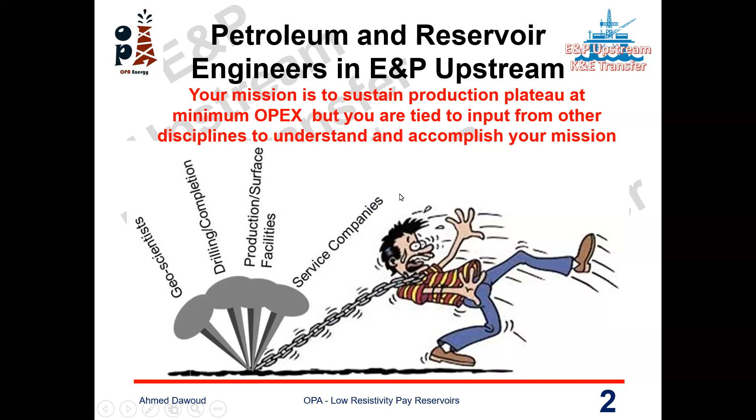So when I say sustain production plateau, I mean, if we are producing 50,000 barrels a day, we have to ensure that those 50,000 barrels a day can be produced for a long time.

Losing production means that we have to spend money on operations to rectify this problem and bring the production back.

So upgrading in the case of enhanced oil recovery. At one time, we have to look at how to better enhance the recovery from those reservoirs.

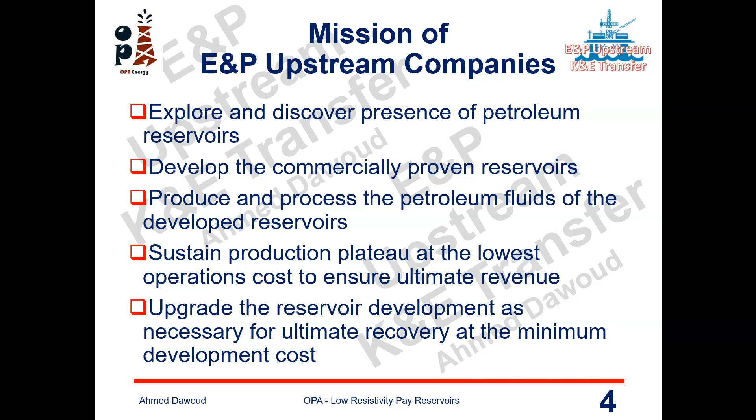So this is the big title of the company's mission that we are taking responsibility for. It's mainly the responsibility of the reservoir engineer and the petroleum engineer. The other supporting teams—drilling, workover, engineering, construction, production operations—they support bringing that oil to surface. And we have to manage how we can keep this oil sustainable for a long time.

We are driven by objective. The objective is to ensure that production is sustained and the target export is achieved.

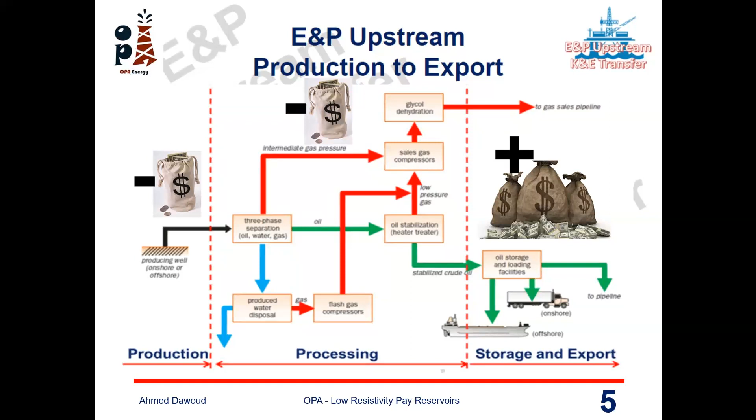As usual, this is a quick start of what we are doing. We start with the seismic, and the geologists are looking at a play or prospect that way you can drill. You shoot seismic lines—3D seismic, 4D seismic, 2D seismic—whatever seismic acquisition is done.

We have to be involved in understanding how this shooting is done and how it could affect the reservoir, and how we could provide data that helps in processing and interpreting and understanding the reservoir, because the reservoir is rock and fluids and pressures based on the compressibility of rock and the fluid pressure. So seismic people would need this data in order to process and interpret the seismic data they receive.

The communication link between us and the geophysicist.

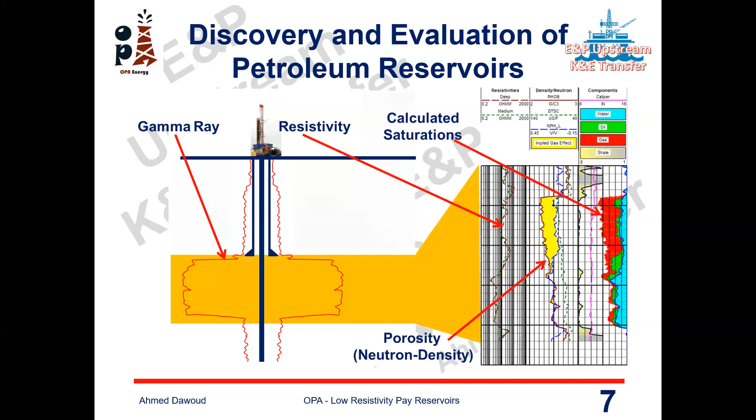As well, when we drill a well, we are targeting this nice reservoir here, and we are eager to understand how this fluid distribution is vertically and laterally. So once we have a picture of such beautiful saturation profiles, telling us how much oil is distributed vertically and laterally, we would be able to model it.

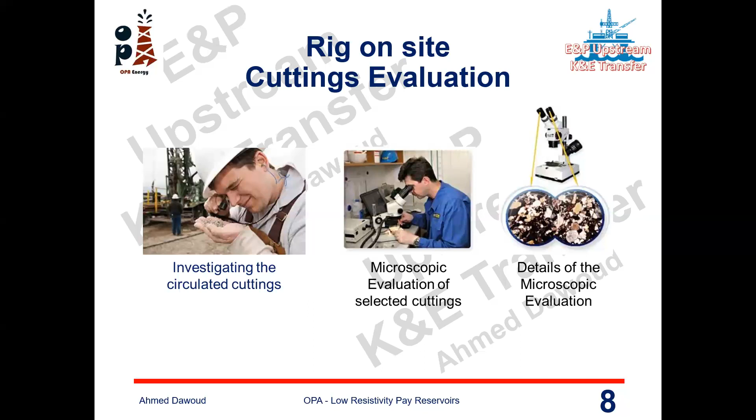In the old days, we had to use the mud logging engineer, who could investigate the cuttings and find out if there could be a reservoir during drilling, so he could stop drilling and test, and sometimes run open hole logs if necessary, sometimes run casing and cement it, and production test if we find it's a must. But in most cases, it's along the hole—this mud logging provides data about the reservoir and the formation we are drilling through.

So when we run logs after that, after reaching TD, it's not necessarily that we could see a good saturation profile, because the mud in the well would invade and mask this saturation profile. This is why mud logging is one of the key elements to identify the presence of hydrocarbons and signal the need for testing requirements.

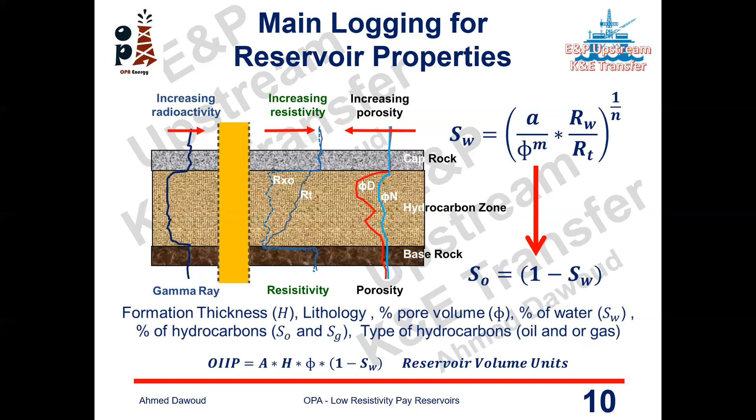The saturation profile, as we can see here, is needed in order to map the development of the proven oil pool. We have that thickness, we have this area, so we can decide on the number of wells that need to be drilled in order to be in business and produce what we are looking for. It can be staged development, it can be one go development, whatever the strategy calls for.

This is the problem of the low resistivity pay. If I don't have this saturation profile, I'm not in business anymore.

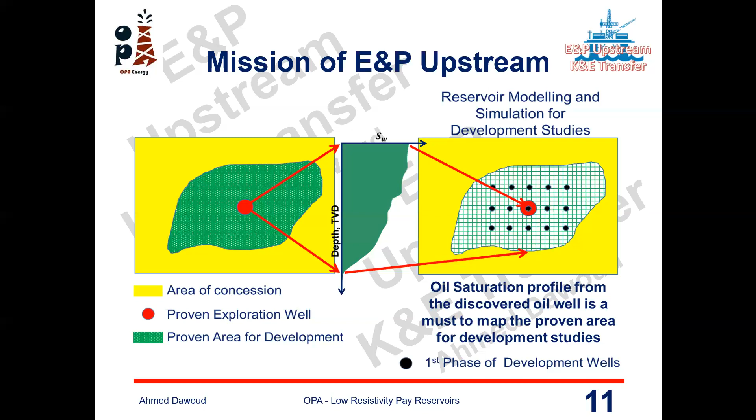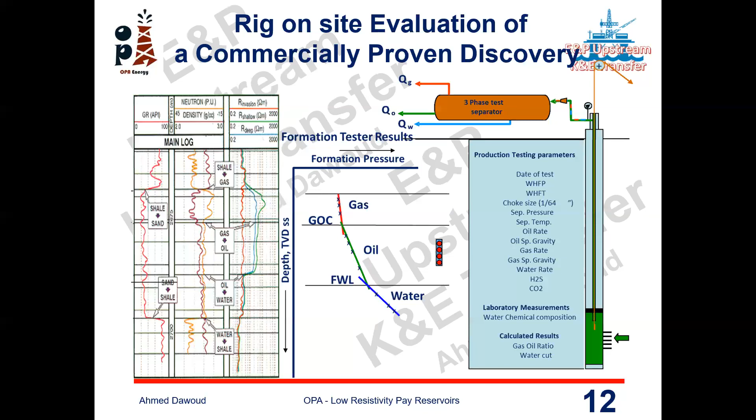This will tell me that I have that long column of oil, that long column of gas, and this is my contact that can help me mimic the picture of this saturation here. Production testing will give me all the feasible data that I need to produce at surface, plus pressure data about the reservoir. So I'm capturing all the information needed in order to model this field.

So if you have good reserves, you can sustain production for a long time. If you have small reserves, you'll see you are shooting a production, and then it will drop and you lose production after some time. This is the problem of low resistivity pay - it means that you don't have that much production to sustain it.

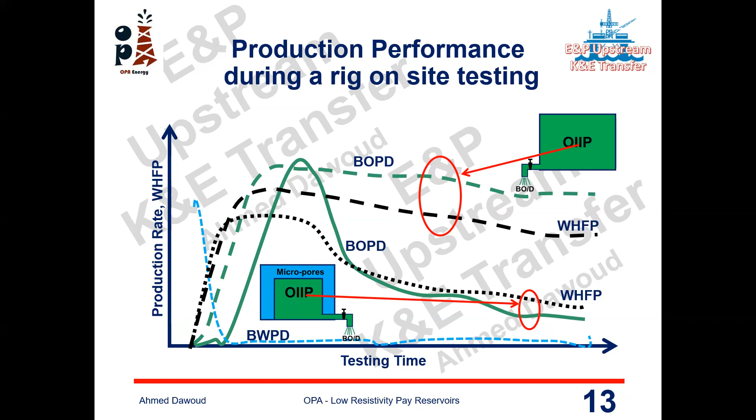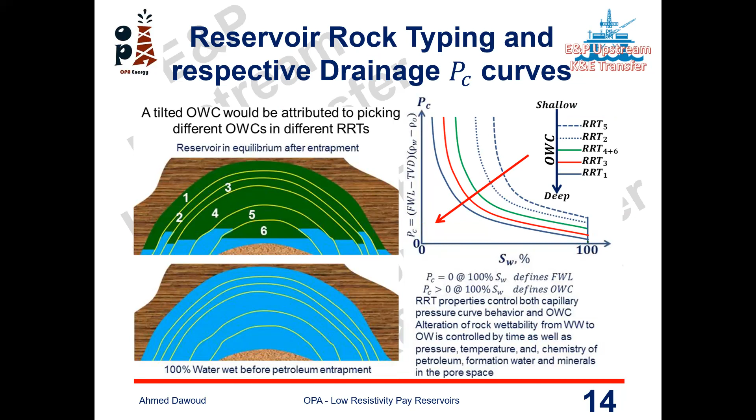So you can draw this picture of the reservoir, identify the reservoir rock types, identify your capillary pressures, mimic a 3D picture of the reservoir that can tell you this is the structure, this is the oil pool, this is the gas cap, this is the bottom water, and this is the area that you can safely develop with whatever number of wells.

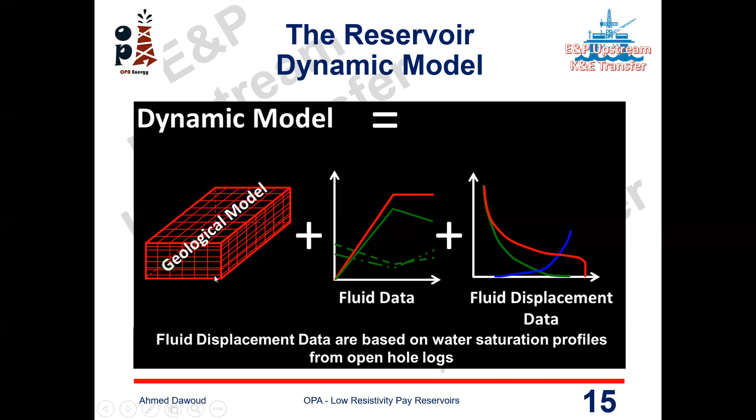So you include the geological model together with the fluid data and the fluid displacement data to come out with dynamic models that can mimic the dynamics of the reservoir while on production or injection. Once we do this, we can investigate the possible development options - whatever pressure support scheme, peripheral, or pattern development - because you are investigating the optimum method of developing this field in order to achieve ultimate recovery out of whatever is stored in the reservoir.

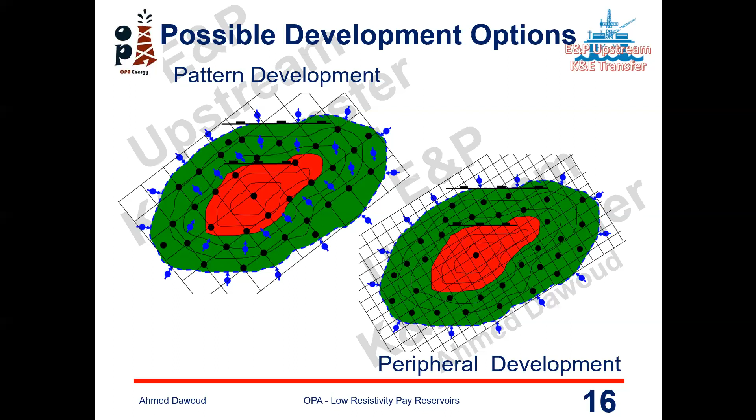This is all controlled by the saturation profile. Management would decide if you can go for fast cash flow, a middle plateau, or a low plateau that you can sustain production for a long time, and each will give you a different recovery. So if you are shooting for cash flow, you lose recovery soon, and so on.

So these sensitivity cases are investigated by the reservoir simulation engineer, who depends mainly on how good he could mimic the saturation of this oil pool laterally and vertically, because he needs to be sure that there is oil that can be produced to surface.

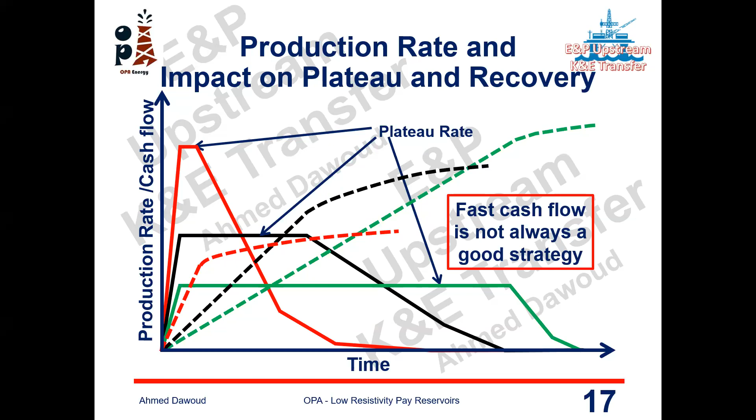So you started drilling, you fix the production facilities, and we are in business. This business is billions of dollars. This high expenditure depends, as I keep repeating, on how good a saturation profile is discovered.

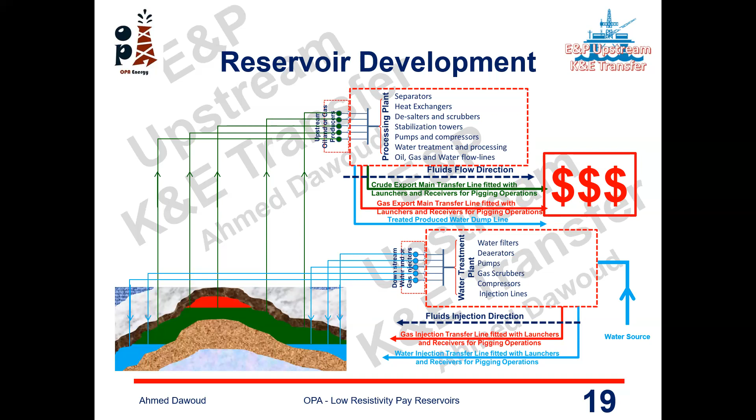You have a saturation profile, you are in business. If you don't have a saturation profile, there is no way you can mimic whatever is existing in a reservoir.

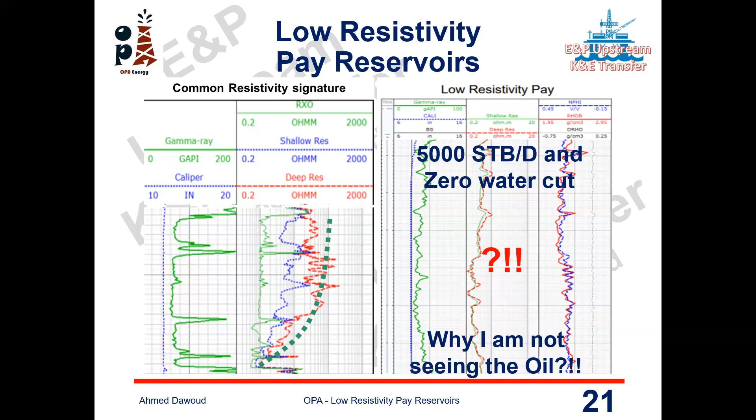Can anyone believe that this is a 5,000 barrels a day producing formation with such very high water saturation? No one can believe it. There is something wrong about interpreting this 5,000 barrels a day. The doubt about this saturation profile, the resistivity, is controlled because we know the tool, the physics of the tool, and we know what might be there during drilling. So the anomaly we are looking at today and trying to understand and solve is how we can interpret a low resistivity pay reservoir.

Experience it from the high reported production tested rates without any details of production testing technique, without any gas or oil saturation profiles, no definition of producing intervals, no definition of the producing development area, no volumetric figures about the discovered oil or gas. If you put yourself in the office of your manager after discovering such a reservoir and you don't like it, can you sell this concession? There is no way you can sell such concession, even if it tested 10,000 barrels a day, if you don't have a figure of how much oil in place it holds.

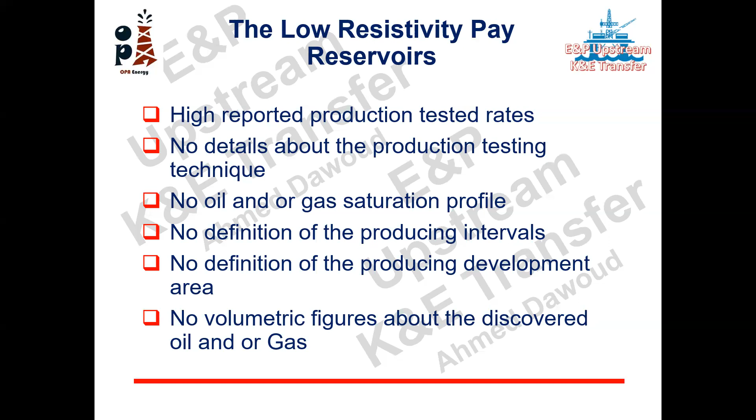So we are not in a business if we don't have such a profile of data. If you check the reported cases in carbonate formation reservoirs, true resistivity less than 1 ohm meter. So calculated saturation 85 to 100% using Archie, and they still could produce 1,500 to 5,500 stock tank barrels. And the surprise is zero water cut. Very low resistivity, very good porosity, very good production rate, and zero water cut. Even the saturation by Archie is almost 100%. Sandstone, you find similar, 2,600 barrels of oil per day, say more than 70% water saturation, and zero water cut.

25 million of gas, 3.6 millions of gas. The NMR that some people reported, this high water saturation was attributed to micro porosity, that holding immobile water. Can you imagine if you have micro porosity of this reservoir holding immobile water, what would be the level of the average log porosity?

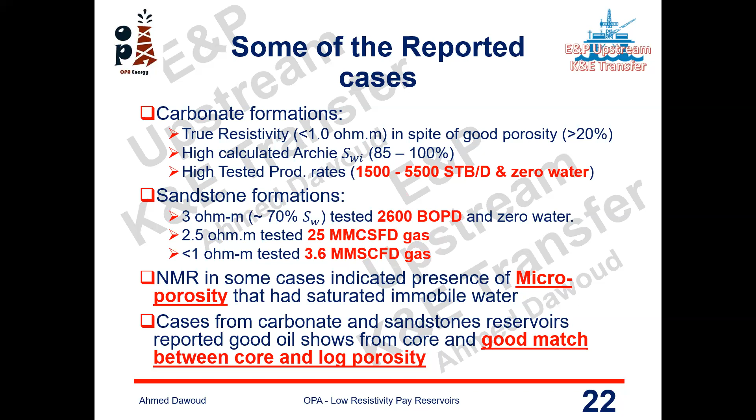And this is one of the input to volumetric calculations of the oil in place. Cases from carbonate sandstone reservoirs, we noticed the reported figures advised us that there was good match between core porosity, which is the effective porosity, and the log porosity. If I believe that this was true, then I would have to ask myself where the micro porosity was that holding this immobile water.

So this is the case here, as you can see in the resistivity and porosity, they are matching. Neutron and the density porosity are matching. Quite clean gamma ray. And even though, the disappointing here that you cannot construct a saturation profile. Would you consider this a proven discovery? And if it is proven discovery because you tested 5,000 barrels a day, would you consider it as commercially proven?

You as a reservoir engineer or petroleum engineer have to ask yourself always when you face such a situation, because by the end you are taking responsibility of delivering production to surface and to the market. So the decision, if you consider this is an exploration well, and you have such a picture, what decision can you take? We run a production test regardless of what we are seeing here, if it is wet or do we have some hydrocarbons that we are not seeing? Or we consider it a wet zone and quit the location.

In most cases, the owners would not go for spending more money unless they have quite evidence of good hydrocarbon saturation. In this one, if there is no evidence, they will not go for testing. Unless you have a strong indication from mud logging that you have high counts of gas, you have some oil shows from the cuttings. But to depend only on TD wireline logging results, you would be in a mess. So we have to bring all the pieces of the puzzle together in order to understand what could be there.

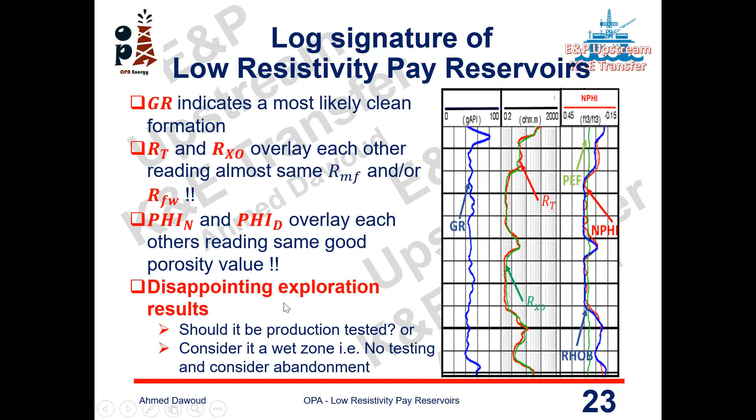These are some examples, reservoir A, B, C, D, and surprisingly you see 100% water saturation and the formation fluid gradient from formation tester showing oil, light oil 0.27, heavy oil 0.38, heavy oil 0.33, almost fresh water 0.45. This is less saline than the seawater. And they all reported 100% water saturation. And you can see on the other side, very high rate with zero water cut. 4,800 barrels a day, 2,000 barrels a day, 5,500 barrels a day, and no drop of water was reported.

As a reservoir engineer, I would have to question all this data, how it comes that we have such oil with zero water cut and this high saturation. In the case of MDT, which I trust because I know the pressure points are seeing the continuous flow phase, and that phase would be related to whatever it reflects as gradient. So if it is oil, it is oil. There is no way you can misinterpret the pressure points. Instead of saying formation water of 0.48, it could tell you 0.27 oil. There is no way. But you can get some change in the gradient that could be close to whatever you are trying to understand.

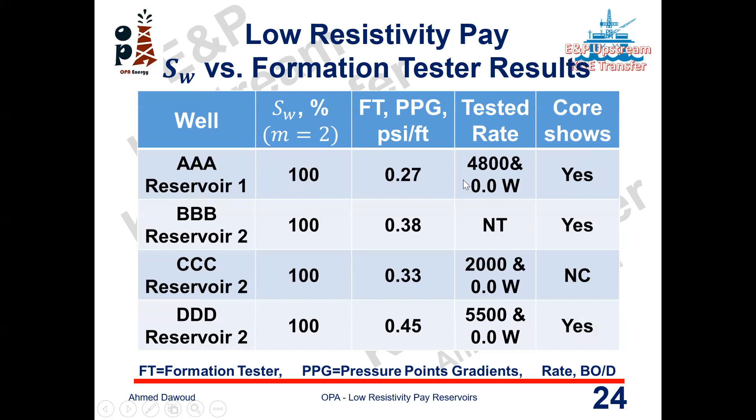Coring, the core operations indicated shows oil in 3 of 4 wells. The other well was not cored. So if you bring all this information together, you have to ask, what was the problem? What happened that could change the nature?

Under natural conditions, we know exactly what should be. And when we interfere in this condition, we can change it because we are drilling. So what we know and what we don't know is based on what we have as surface facilities and drilled wells, but data captured from the reservoir itself as rock material, as logs, as production data, as pressure data. All this will give us the pieces of the puzzle that we have to understand the uncertainty level of the reservoir. And we can decide what needs to be done in order to ensure that the mission is achievable.

So how much we know about this reservoir is controlled by the amount of data and the quality of data. And this is your responsibility as a reservoir engineer, as I am myself as a petroleum engineer or reservoir engineer. I have to find out what data is available, and how these data are captured.

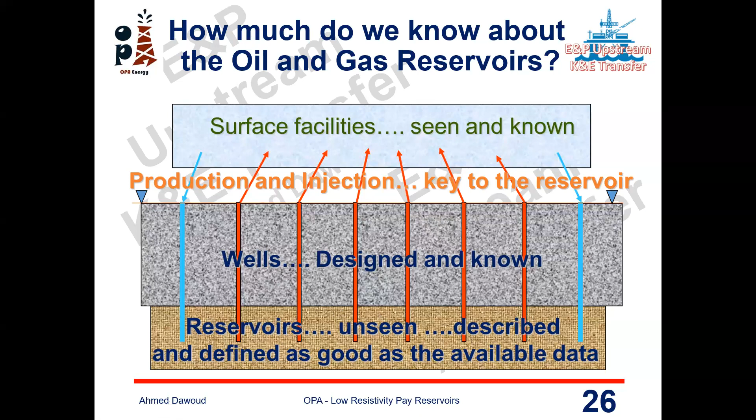Lithology, we are talking about huge changes of the formation from being clean to complex to dirty, whatever. These are all wording - you can word it, you can write it in a text, but when you take it to the simulation model, you have to convert it into numbers. Unfortunately, there are no numbers that can bring the dirtiness of these formations into the simulation model. But it's good to understand this is the type of reservoir rock we are dealing with, because by the end this can help explain why I am seeing the low resistivity pay.

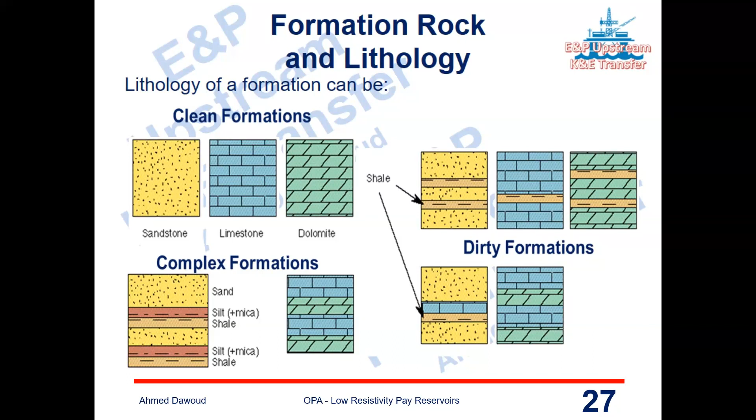But when you come and tell me that this low resistivity pay is attributed to the micropores that have immobile water, and this micropores is part of the 20%, 23% porosity by logs, then I would have to imagine the split between this micro and the macro, because the micro would be dominant, meaning the macro could be few percent and this one would be very high percentage. I'm trusting the porosity number by logs, because it's logged in every well using the same technique, using the same physics. So I have no doubt, but I started doubting the definitions here if I don't have the source explaining why this is the main contributor to the phenomena we are looking at.

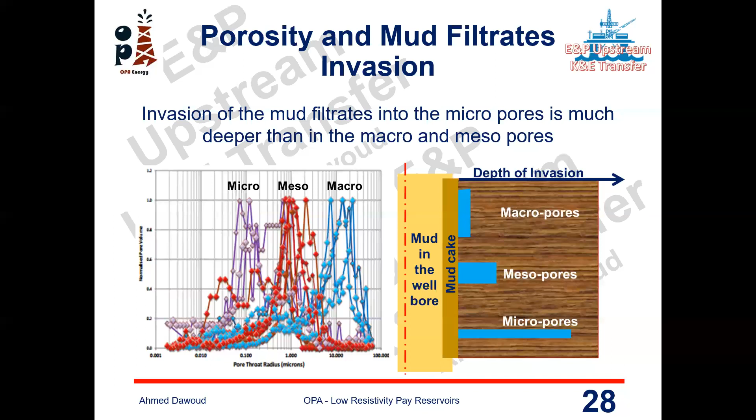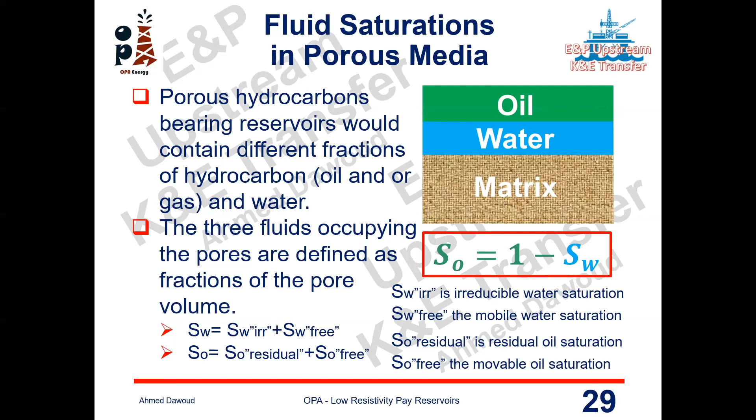But when we introduce the drill, we are disturbing the nature. The natural condition of the reservoir rock is disturbed by the mud filtrate while drilling. So how far this mud filtrate could displace oil away from the drilled hole is a problem controlled by drilling operations. As a petroleum or reservoir engineer, I have to be on top of the drilling operations in order to control the mud weight while drilling and avoid mud filtration going deep into the formation.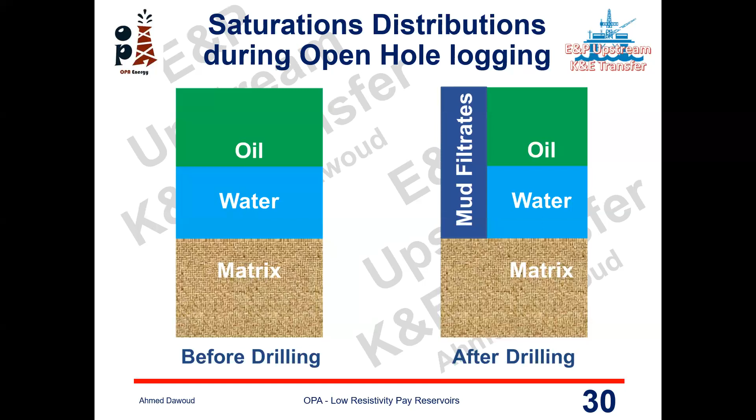You can see it here. If it is natural, it's not invaded. While drilling, you see some mud going deep, and after pulling out and running wireline logs at TD, the invasion has gone deeper. We have what we call logging while drilling, which is an advantage to avoid this invasion effect, but not every company uses it because of budget limitation.

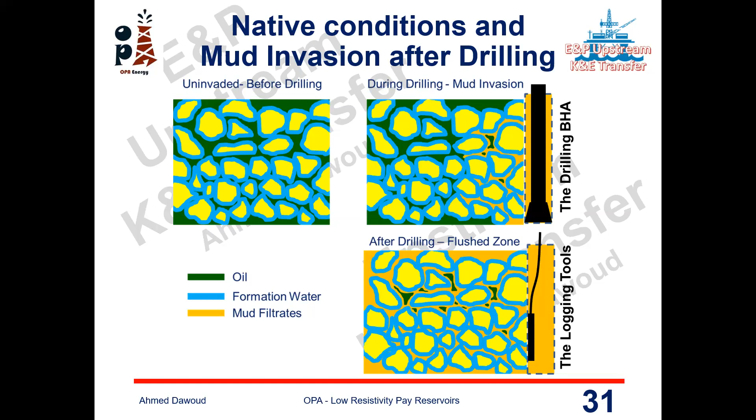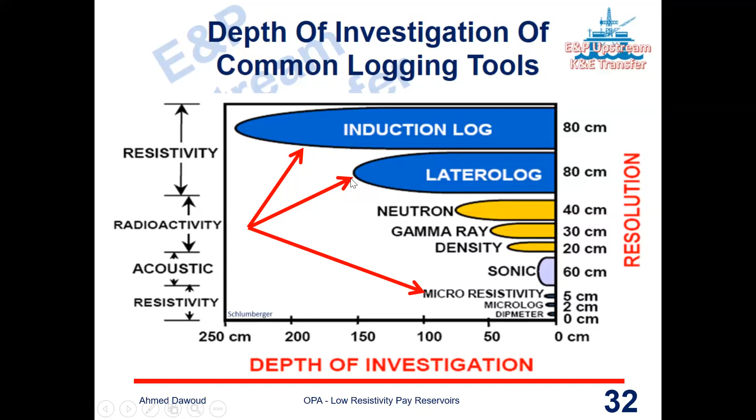So the problem definition of low resistivity is related to the recorded resistivity by logs. It's very low, could be down to 1 ohm meter, and the water saturation calculated from Archie would be almost 100%.

This used to be interpreted during the old days, because in exploration wells, you are not spending that much time and money to find out what is behind the problem. So when they used to see this wet zone, they would quit the location. If you don't have oil saturation profile, you don't have a discovery.

So if the geologist or driller or whoever is witnessing the job comes out and says that you tested 5,000 barrels a day, zero water cut, in a reservoir that has resistivity less than 1 ohm meter, what would you say? Do we have a commercially proven discovery, or is it nonsense?

It's a difficult decision for management if you are telling them about such low resistivity pay. They always need something they can explain as money that can be production. But with one well, you don't know where else you can drill another well, where you can add perforations, how many wells you will need. There is no data that you can decide development on.

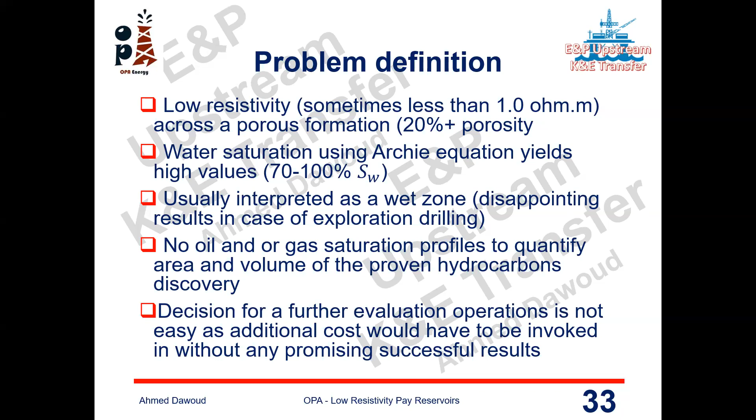So the factors affecting low resistivity pay are reported everywhere, and since we are dealing with the formation, both the formation and the external part are known. If you combine all this, you should be able to find the conditions leading to this low resistivity pay phenomena. We have static conditions related to the reservoir and properties of the rock.

So you can call out conductive minerals, presence of conductive minerals, microporosity holding this immobile water, and presence of fractures. But if fractures are present, they can be filled with mud filtrate, but not in the whole thickness of the reservoir. The problem with a fracture is that it is a vertical plane, so it will be connected to overlying and underlying reservoirs.

There might be some cross communication between oil reservoirs underneath or overlying this low resistivity pay, and you are actually testing one of those reservoirs. So you have to investigate why there is this high production and where the source of this production is coming from.

Dynamic conditions: we always experience deep invasion, and possibly drilling may induce some fractures. Directional drilling can be one of the reasons, because when you drill directionally, you are not intercepting the same reservoir thickness as in a vertical hole.

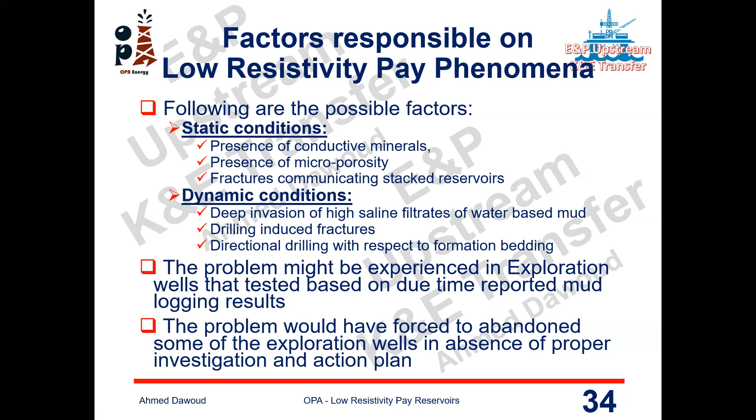Most of the time, you are forced to abandon the exploration location, so you are losing a chance, and no one would like losing a chance. You are very close, and you quit and go, because the management decision is to avoid spending more money, and they will quit the location.

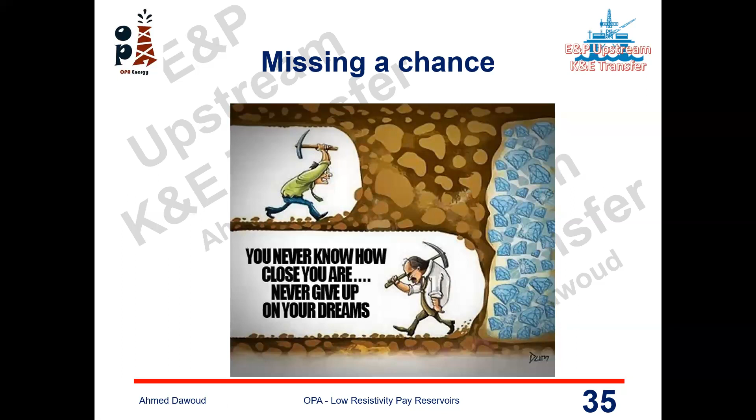If we look at investigating the problem: how many conductive minerals could we have, and how could these conductive minerals result in such low resistivity? Why are we seeing this specifically in this location and not everywhere? Because if you are in one reservoir, the depositional environment is the same.

Reservoirs are deposited at the same time at the same conditions, and they are close. You can find the reservoirs in the Gulf of Suez comparable to reservoirs onshore of the Gulf of Suez. The deep water is almost comparable to the onshore reservoirs. There is a comparison always because the depositional environment has not changed over millions of years.

When you say microporosity, we talked about it, how they could hold this immobile water, and by the end you have some big pores that can produce that much oil. This all can contribute to the phenomena, and this I would call a static understanding of the problem.

But when you concluded this low resistivity pay, have you concluded this problem based on static or dynamic conditions? The conclusion was made based on high production rate at surface, without referring to how good the permeability is, how big the pores are. The problem we suffered from is that there was no saturation profile. So if you don't have a saturation profile, how could you conclude such a high rate?

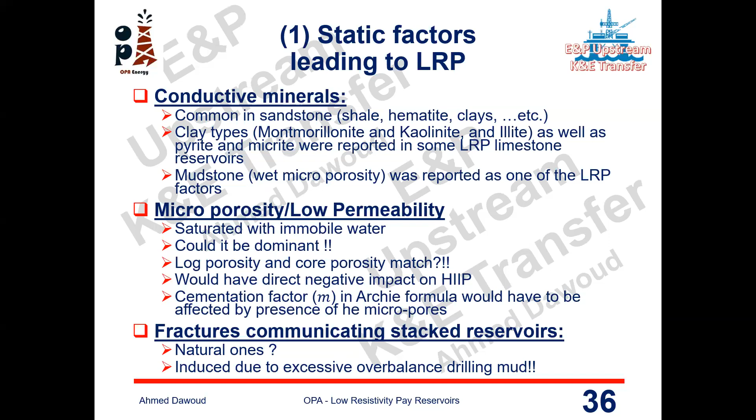Fractures and the communicating stacked reservoir - are they natural or induced? They will lead to the same understanding. They communicate the oil reservoir with a wet reservoir, and when you produce the wet zone, you can bring the oil up from the oil bearing zone.

The RXO has a limited depth of investigation. The RT has a very deep depth of investigation. So the only explanation you can see is invasion effect. So you understand that the problem could be attributed to mud filtrate invasion.

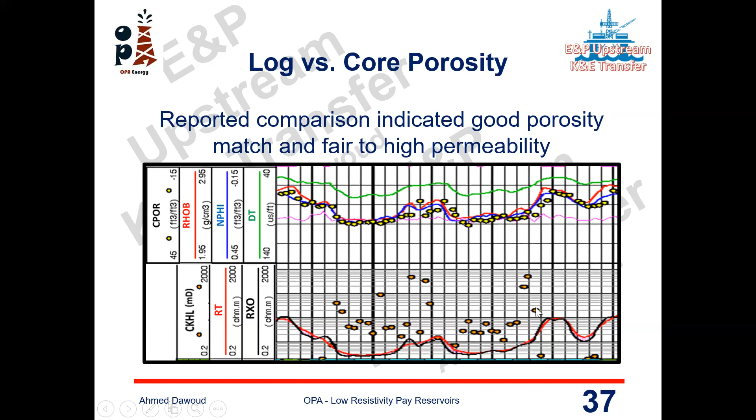Now you are speaking about 5,000 barrels a day, and that's related to storage. If you have the micropore effect here, you don't have this much oil storage. So instead of saying high production rate of oil, you should be saying few barrels of oil if the micropores are dominant.

So this is another key to understanding the problem. There must be a source for this 5,000 barrels a day dry oil production. You can see here, when you calculate this oil in place, you need area, you need thickness, and you need the saturation. But you don't have the area of the pool, you don't have the thickness of the column, and you don't know what is the level of saturation in this oil.

So we are not in business. We are losing a very good potential productive reservoir because there is something wrong during the operations that we have to understand and overcome.

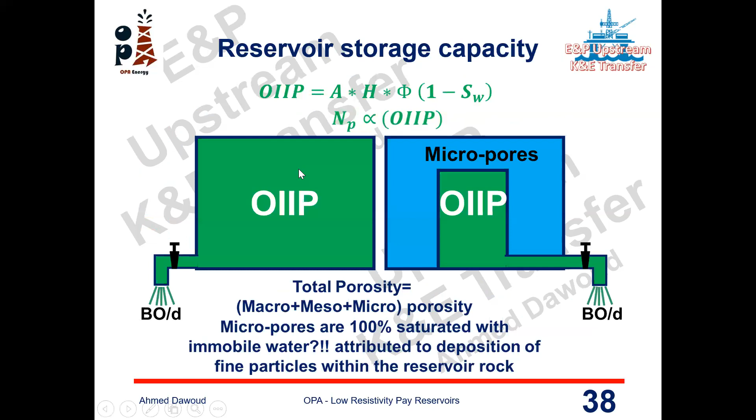Dynamically, if you look at the dynamic data - directional drilling and the logging model. The logging model is designed to be perpendicular to the formation beds, but in directional drilling it's inclined. So there may be misinterpretation between the reservoir feeding in and the reservoir which is tight, especially if you have shale layers.

Excessive mud overbalance and deep invasion, as we said, is one of the main reasons, and we can see how this could affect your calculated figures of oil in place. Fractures as well, either natural or induced.

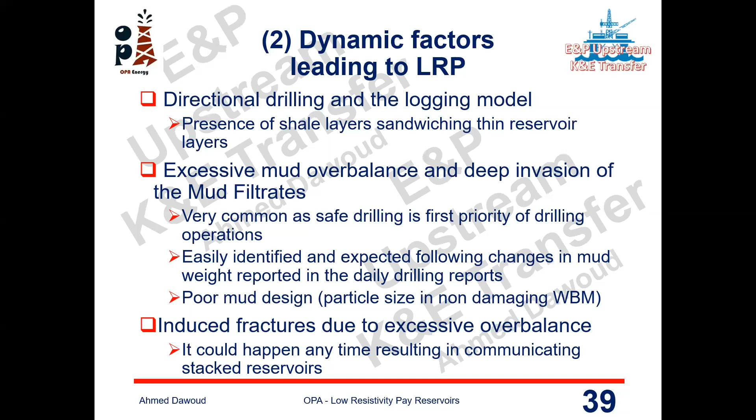Investigating the problem, you speak to the geologist, you speak to the petrophysicist - everyone would tell you about static data: the depositional and stratigraphic facies, the diagenesis, the core description, open hole logging technique, whether it's wireline logging or LWD, whatever. If you know how the data was captured, you might be able to put your hands on the wrong information.

Whenever you have core studies, you can tell how these pieces, how the core samples could tell about the reservoir. You can investigate the whole core plugs, thin sections, the pictures from X-ray diffraction, whatever. You can look at all the data and find out what might be the anomaly in the reservoir. But none of these static conditions would explain 5,000 barrels a day.

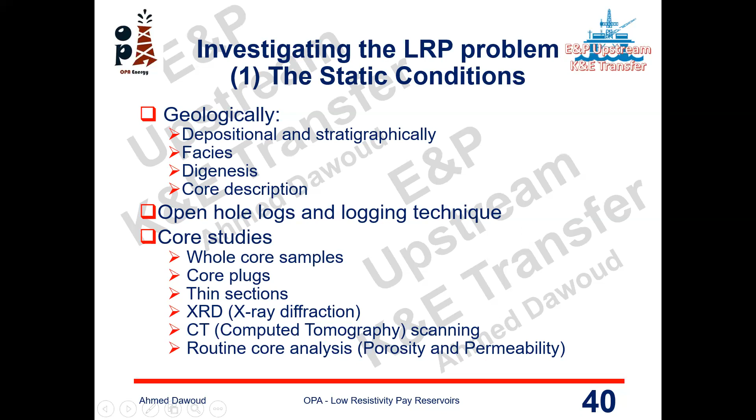This is the logging normal model of the logging tools, and this is if you are drilling across a bed. You can imagine how you can misinterpret. How can you be affected by one bed or another bed? This bed is 1 ohm meter and this one is 50 ohm meter. If you are averaging this one, you can be affected by the 1 ohm meter. Could this be one of the reasons?

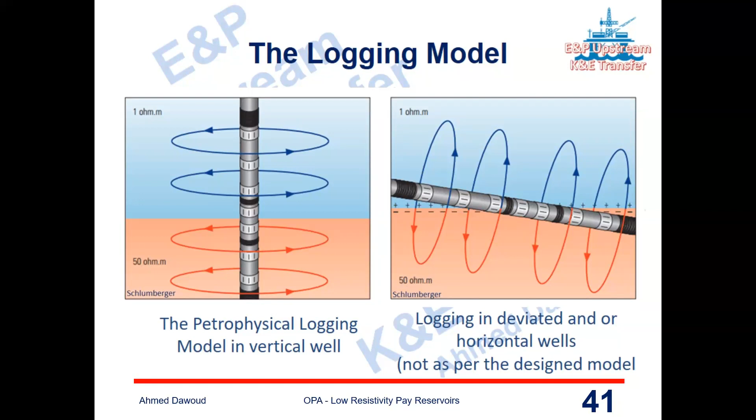We have to go back and find out how these wells were drilled, how they were logged. This reservoir here, you can see it's low resistivity pay. Top reservoir produced 5,000 barrels a day, but the bottom reservoir was not tested.

What are the chances of having these two reservoirs in communication, and you tested the top one through a vertical communication with the bottom one? Is it a possibility? Yes, it is a possibility. But unfortunately, the bottom one as well is very low resistivity. So there is a big misunderstanding about this, because actually you might have produced this high resistivity one. This might be the one that fed in the 5,000 barrels a day.

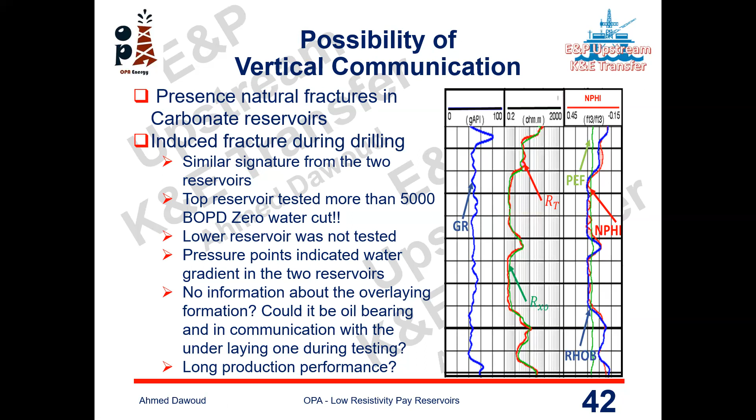Dynamic wise, the drilling parameters are all related to mud design. If you are using overbalance in the drilling, they have the right to drill safely, so most of the time they have overbalance. If you are using quite a representative bridging material, it stops and creates the mud cake and stops further mud invasion.

So can we tell from open hole logs? Yes, we can tell from open hole logs. But how much time do you need in order to tell from open hole logs that the well was affected by hard mud invasion? We have to be sure that this can be computed instantly and in a short time, because the decision to abandon is very crucial.

Pressure gradients of reservoir fluid from formation pressure tester would help to understand what exactly is there. As I said, if you have 0.27 fluid, it does not match by any means formation water of 0.48. So you are sure that this should be a continuous phase of oil, and this may explain the 5,000 barrels a day.

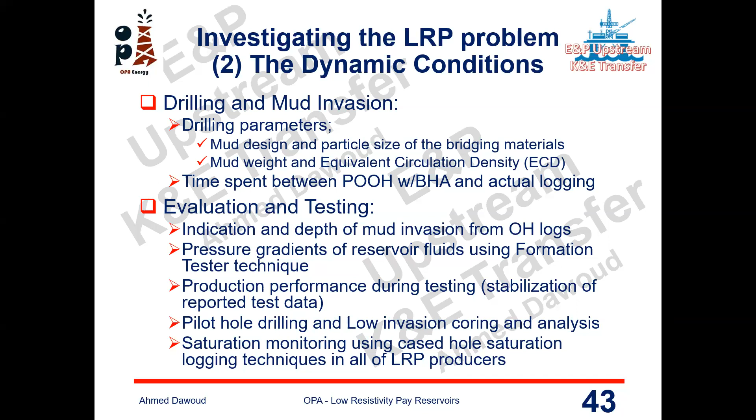Later on, if you have this, it can be used as an observer. In development wells, you can have this low resistivity pay reservoir cased off, and you can use it for observation. You can run cased hole saturation logging tools from time to time to find out if this is a real problem, or if it was an invasion effect and by time the oil will come back.

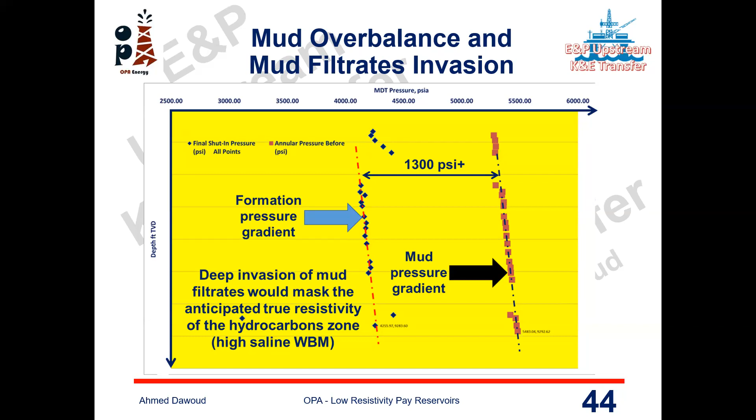But you have to control the overbalance. You speak to the drilling engineers to be very careful during drilling this type of formation.

This is another example. This well was drilled, and after 20 years it was there with nothing done. It was not completed, it was stagnant. After 20 years it was completed and produced. So during that time of 20 years...

TDTs and RSTs were run in this well, and you can see that the oil-water contact moved down from there, and you are seeing high oil saturation in addition to what was initially logged. Simply, what does this say? It says there was a strong invasion, mud filtrate invasion effect that flushed the oil away from the wellbore. After 20 years of doing nothing in this reservoir, no production, no injection, the oil came back and the heavy mud filtrate segregated down.

Luckily, in the same reservoir, another up-dip well was drilled 40 feet shallower than this well, and action was taken to acquire low invasion core plugs. These low invasion core plugs were used to find out the water saturation in the plug itself to verify the log signature. You can see at the top a very good match between the saturation from the plugs and the log, but at the bottom part, when you experience this mud filtrate invasion, you see the same effect.

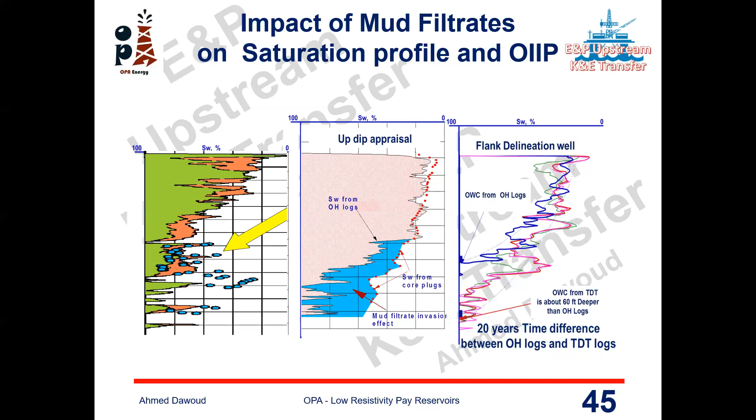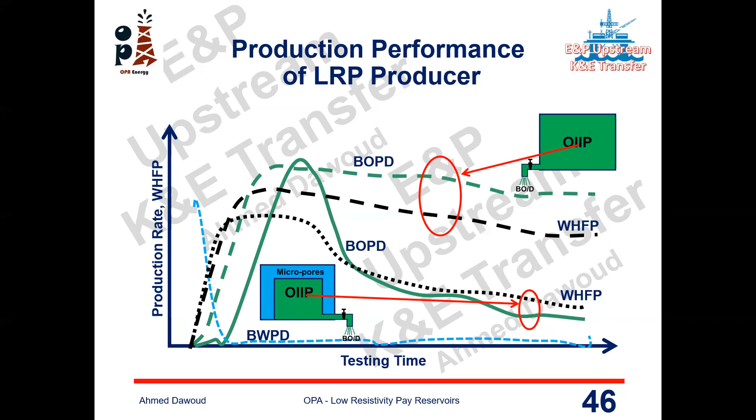As I said, if you have good storage, you can see sustained production and good wellhead flowing pressure. If you don't have that good storage, you can see an increase and then suddenly drop in production and losing pressure. So it's very important, when you decide on testing a low resistivity pay, to produce it at surface through a production separator, subjected to production testing not less than 12 hours at constant rate, in order to see the changes and find out what might be affecting it. But most likely, the reported tested rates were related to open hole drill stem tests.

The low invasion core is one of the good techniques to understand the real saturation of a reservoir. You cut the core, but you inhibit the mud system using deuterium oxide or tritium. Deuterium oxide is chemical, it's not harmful, or tritium, another radioactive one. It does not exist in the formation or in any formation water. It's outsourced and safe to handle, not problematic. Deuterium oxide exists in the formation at a ground level of 150 parts per million, so you can design your mud system to be 3-4 times more than that.

You cut the core, but you cut short cores. Don't wait until you cut 300 feet, because the longer you stay in the hole, the more disturbance you create, affecting the quality of the core you're looking for. We need to retain the initial saturation of the reservoir inside the core, so we have to cut small pieces and bring them out, one joint every time.

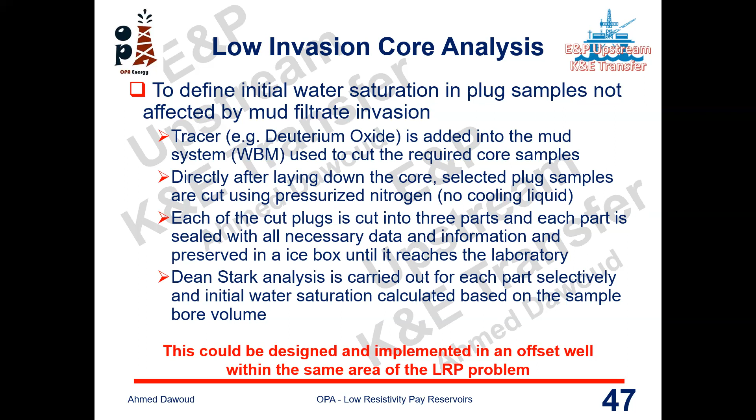You cut the plugs on surface as soon as possible after taking it, and seal it in envelopes. You cut the plugs here, divide the plug into 1 inch from each side, and retain the 2 inches in the core of the plug, each in an aluminum foil envelope, all kept in an ice box, sealed off, in order not to suffer dehydration.

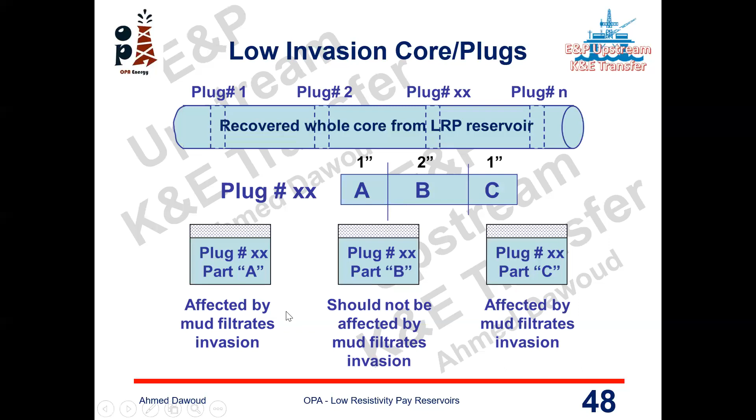So you expect that this outer part would be affected by invasion, mud filtrate, which would be contaminated by the tracer. This inner part would not be affected by the invasion. Thus, we will not see the high count of tracer in this analysis of the middle part. This is the whole idea.

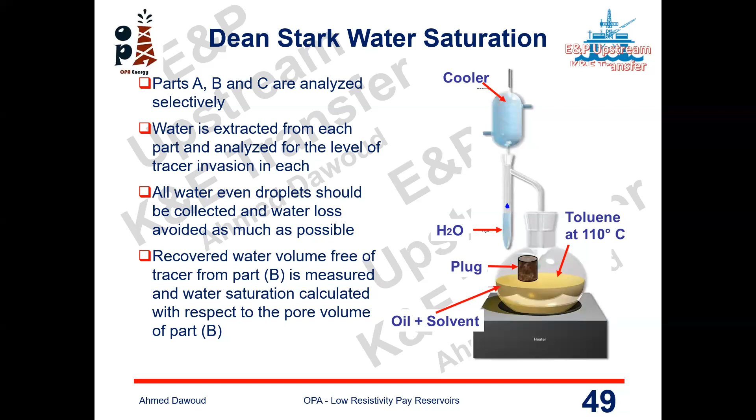You use Dean Stark to isolate this water and find out how much deuterium oxide is in each plug. We have the limit here. Whatever comes below this limit represents the saturation profile. So you can measure the water in the plug, and using the pore volume, find out how much water, percentage-wise, is in the pore volume. If it is at the level of the mud system preparation, then you are sure this is affected by mud invasion.

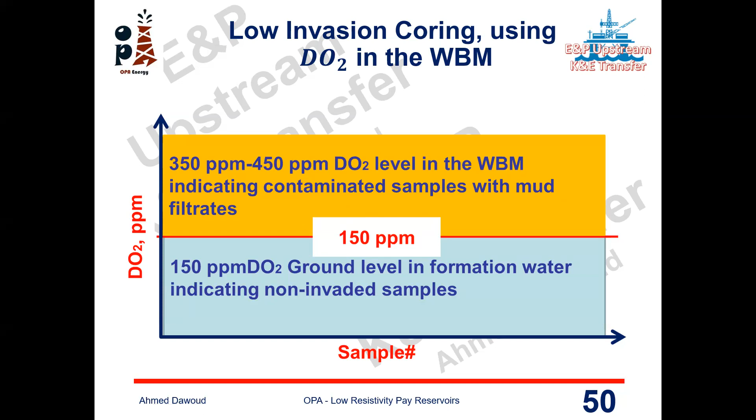If you have to run this, the owner would always be a reservoir engineer. The geologist doesn't care, he's not worried about this invasion effect. The petrophysicist is not worried either, because this invasion is affecting your reserves - you come out from calculations with a wrong oil in place figure. If you don't know exactly what this water saturation level is, you will come out with a wrong oil in place figure. So as I said, it's your baby - you, the reservoir engineer, have to take care of it, witness it, and do it exactly as you have planned.

The coring mud system, as I said, you can use tritium, which is radioactive and does not exist in the formation - it's safe enough to handle - or deuterium oxide, which is very common to use as a tracer. Short interval to core and bring to surface, but you have the rig time and the coring cost. There is always a budget in this.

Cutting and plugging as soon as you recover it at surface - if you ignore it, this tracer would diffuse inside the core and contaminate all the core inside, so it's useless by the end.

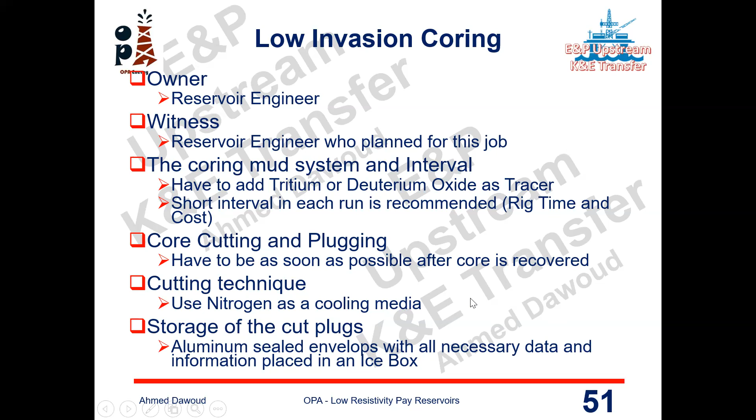So the mud filtrate invasion effect is a very strong phenomenon during drilling that you have to control. You have to discuss with drilling on controlling this invasion effect in order not to lose such a commercially proven discovery.

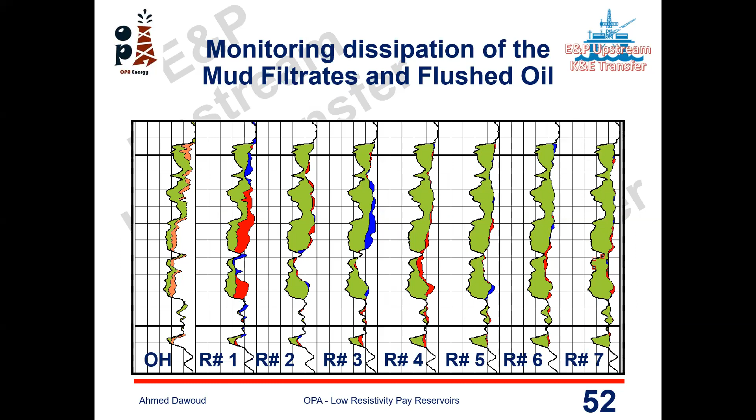Low resistivity pay, we consider it a commercially proven discovery - there's no way you can decide on developing it without this. So it's in your hands. When you have it, it's in your hands. It could be real, but if it is real, are you expecting to produce that much oil, or just a few barrels, not even 100?

Low resistivity pay would not produce thousands of barrels or hundreds of barrels. It can make some tens of barrels, and you would have to artificial lift it - it will not flow naturally.

This is all what I have to say, and I'm open to answer any question or any concern of you, please.